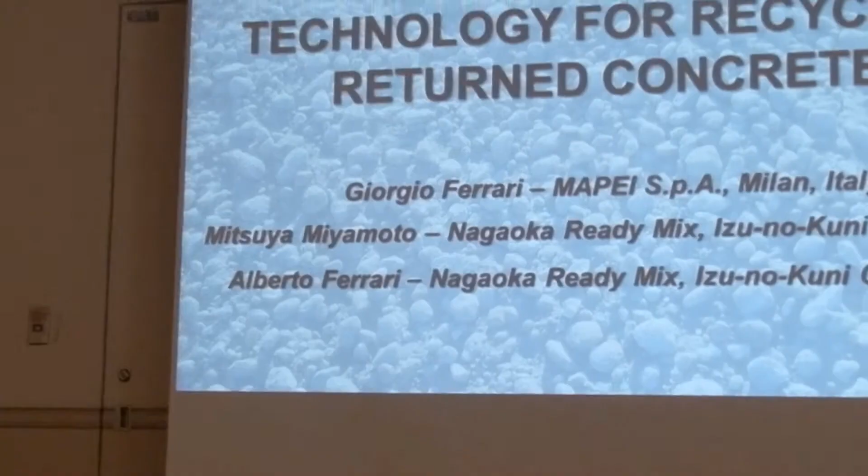I will do the first part of my presentation dealing with the technical and fundamental aspects of the technology, and then I will leave the floor to Mr. Miyamoto, who will describe the implementation of this technology in Japan.

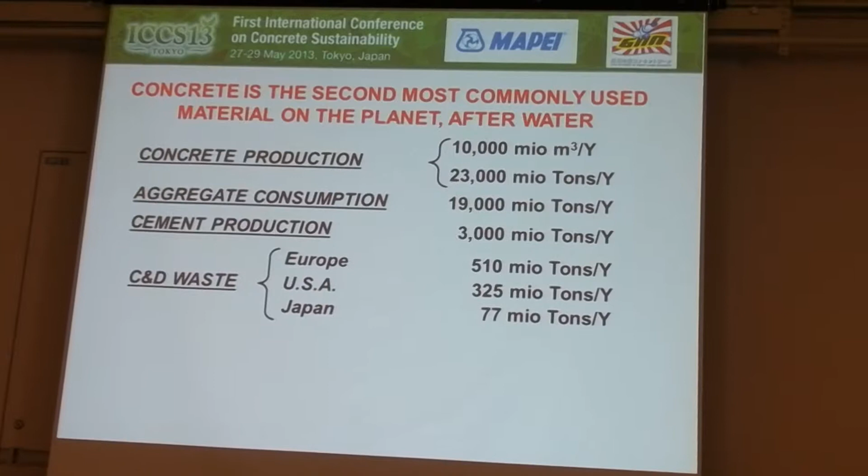Concrete is the second most commonly used material on the planet after water, and the production of concrete is globally huge. About 10,000 million cubic meters per year of concrete are produced.

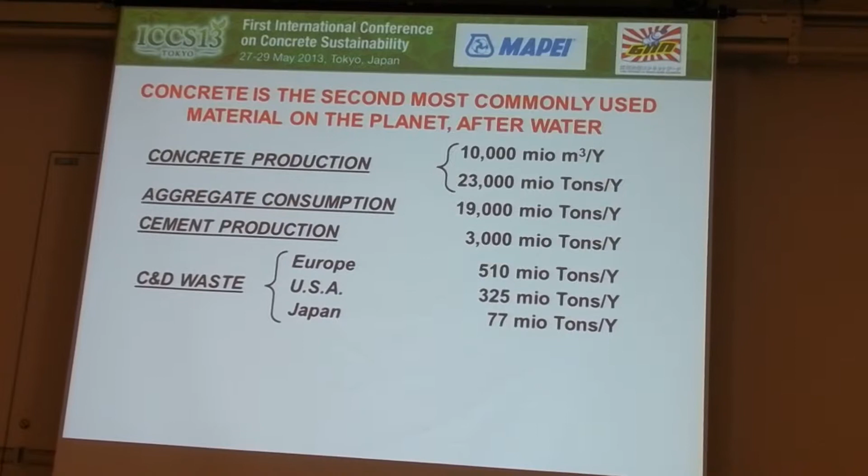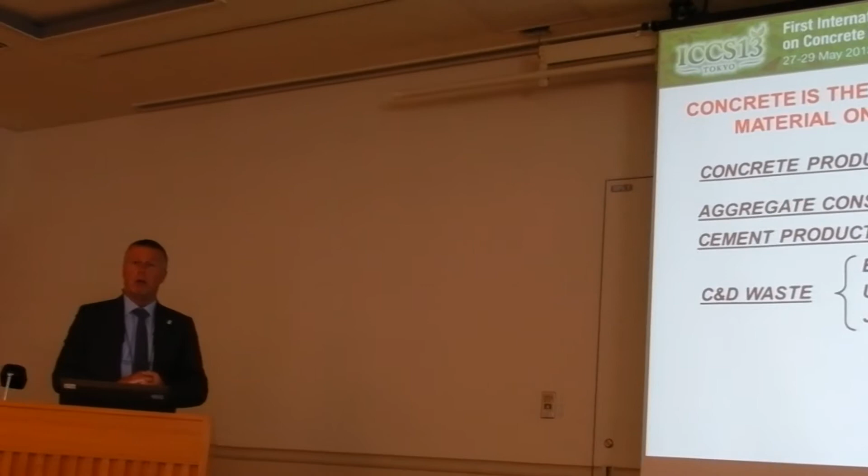This means that a huge amount of raw materials are used for aggregate and cement, and also a lot of waste is produced. Among these wastes there is returned concrete.

Returned concrete is the unset, unused concrete which is returned by the truck mixer from the job site, that for any reason is not placed and comes back to the ready-mix plant.

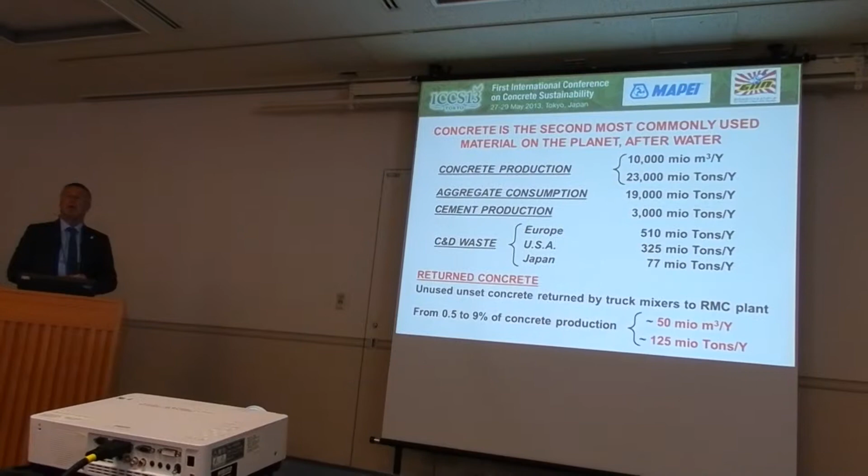In many cases, this material can be a waste with many impacts from an environmental and economical point of view.

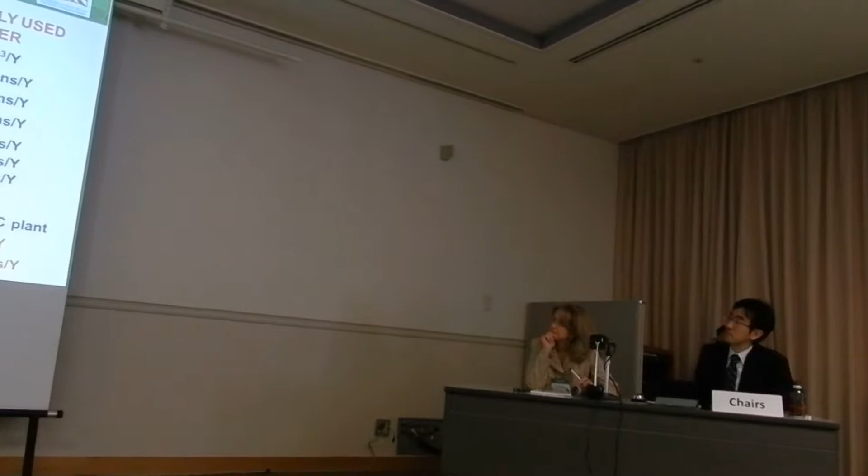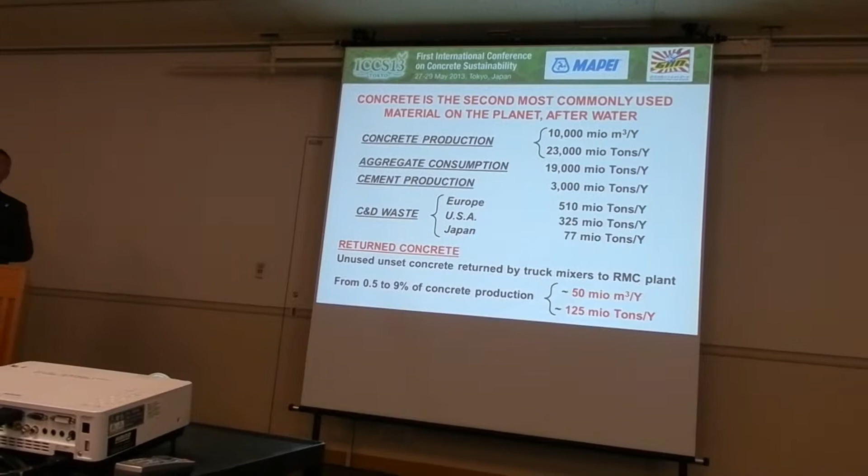In a conservative estimation, the global amount of returned concrete is above 100 million tons per year. That means more than double the amount of the total concrete production in Italy.

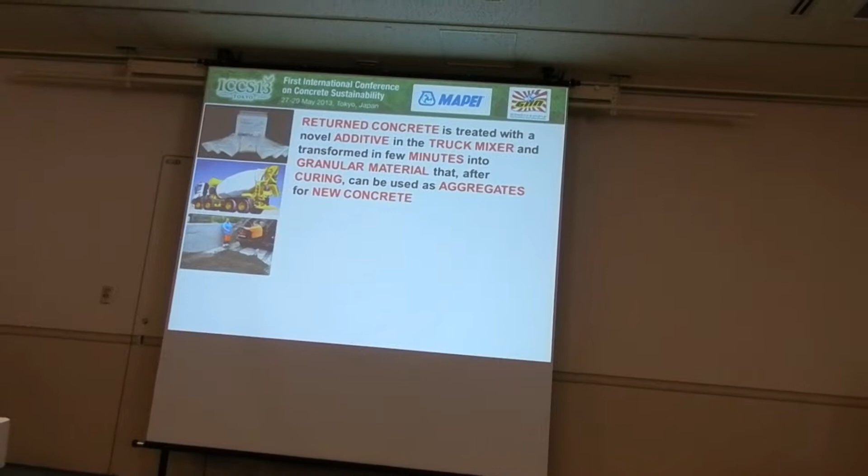With the new technology, returned concrete is treated with a novel additive in the truck mixer, and it is transformed in a few minutes into a granular material that, after curing, can be used as aggregate for the production of new concrete.

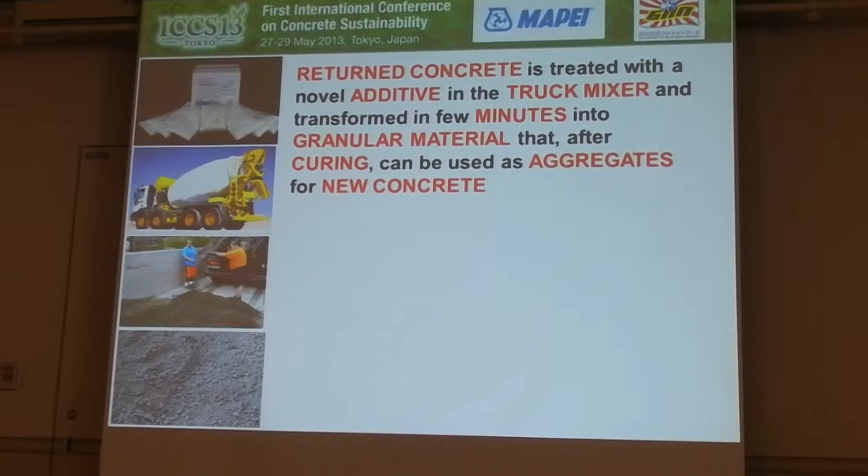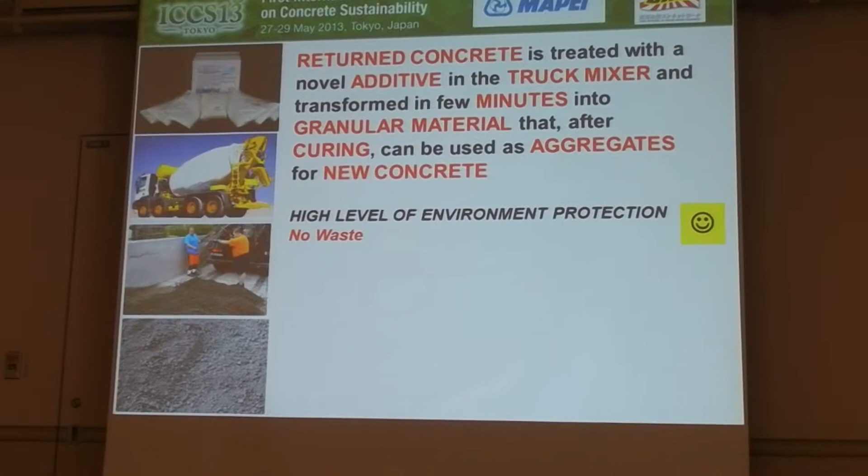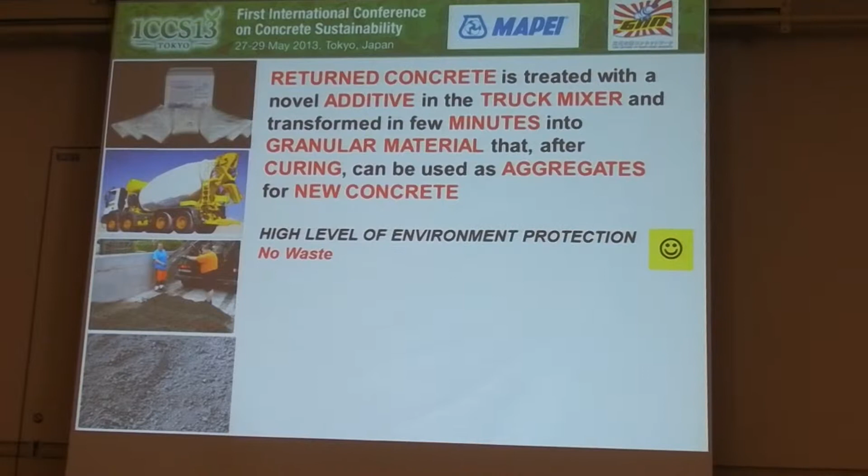This technology has many advantages because it's characterized by a high level of environmental protection, because no waste is produced. The concrete is completely transformed into a new material, so no waste, no liquid, no solid are produced.

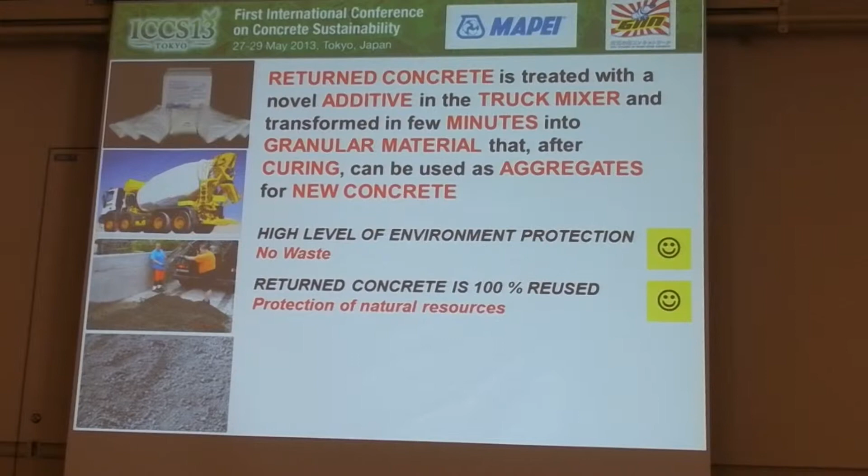The second advantage is that returned concrete is fully valued because it's reused 100%, and this allows saving of natural aggregate, protecting natural resources.

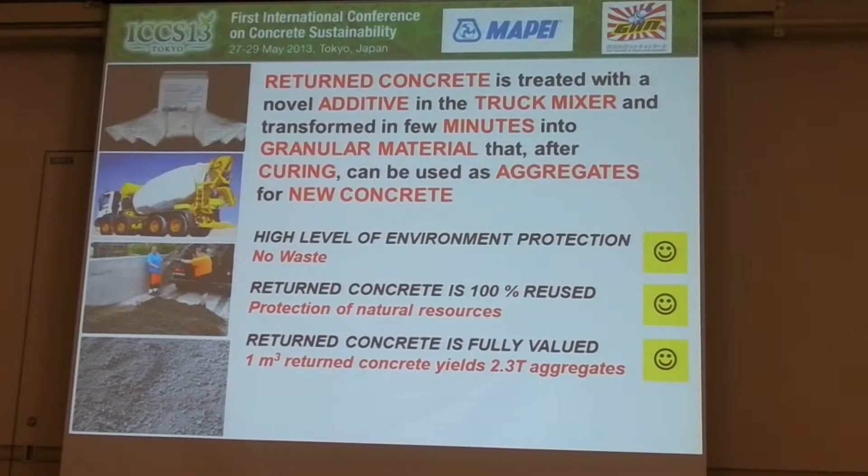From the economical point of view, 1 cubic meter of returned concrete is transformed into aggregate. This means that about 2.3 tons of aggregate are produced from 1 cubic meter of concrete.

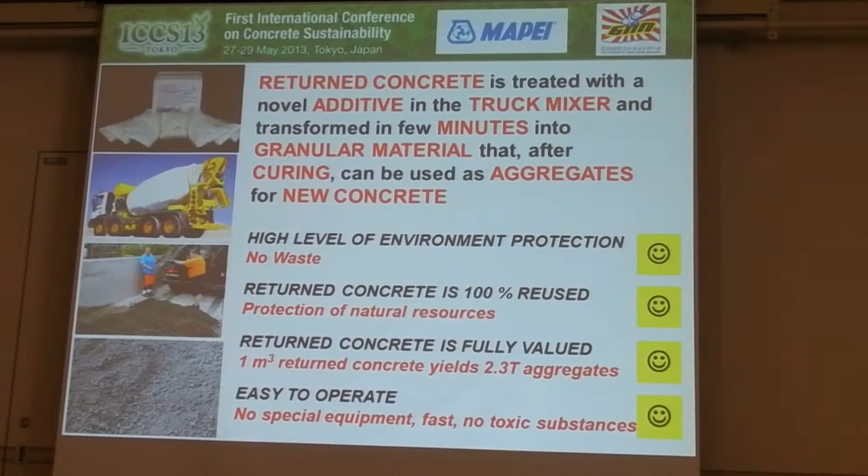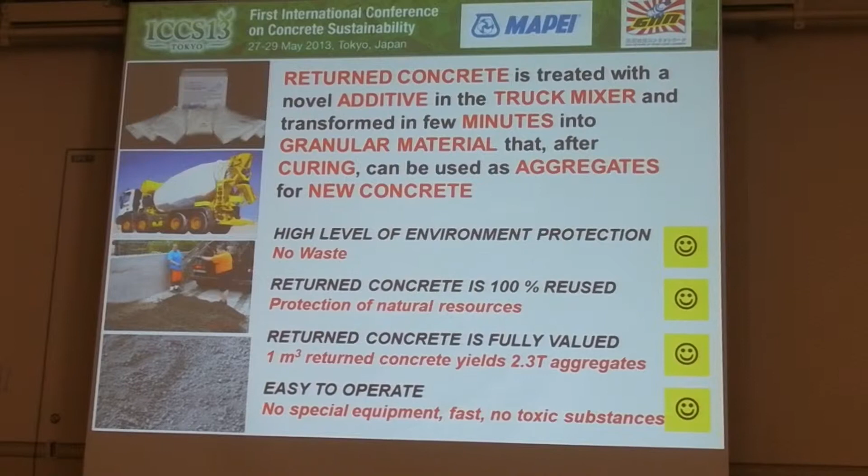It's very easy to operate because it doesn't require any special equipment, as the process is operated directly inside the truck mixer, and it's very fast. The overall process takes less than 10 minutes, and the additives are not based on dangerous substances or toxic chemicals.

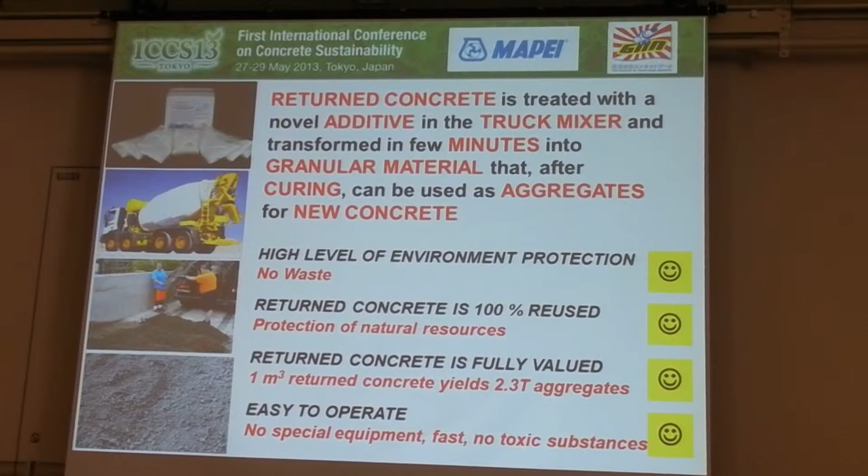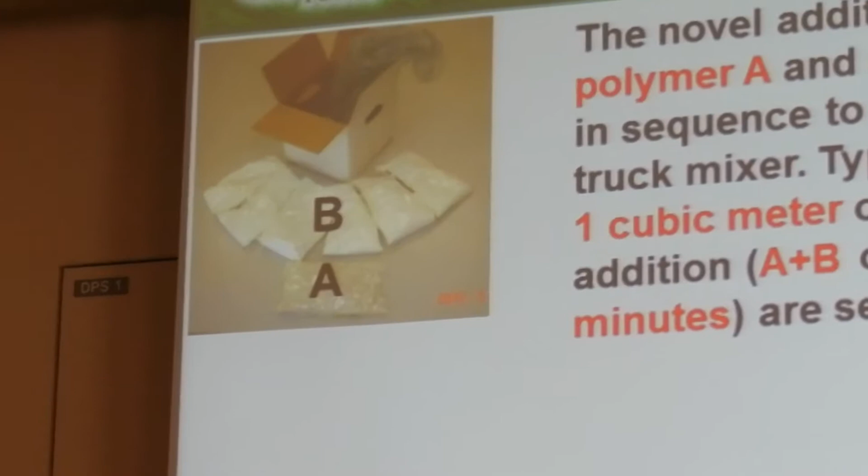The novel additive consists of a superabsorbent polymer, part A, which is in a water-soluble bag, and component B, which is an ettringite-forming compound, that are added in sequence to returned concrete directly in the truck mixer and mixed together.

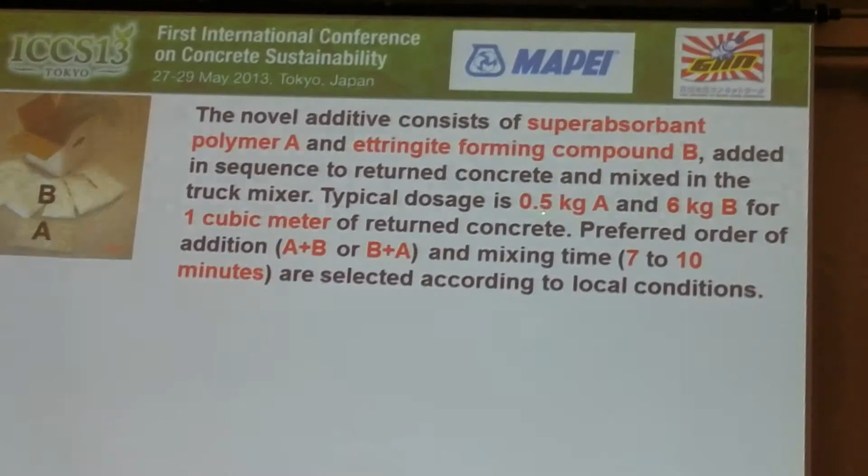The typical dosage is 0.5 kilogram of part A and 6 kilogram of part B per 1 cubic meter of returned concrete to be treated.

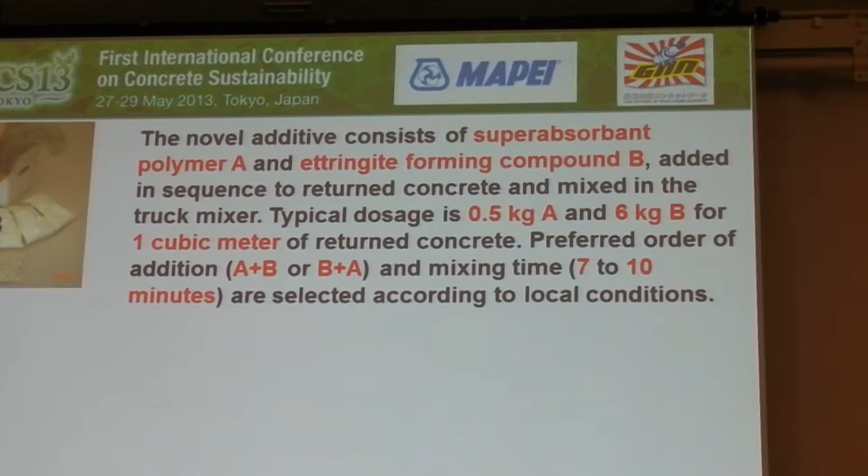The preferred order of addition may be first part A and then part B, or vice versa, first part B and then part A, according to local conditions. This means the type of cement, the water to cement ratio, and other variables.

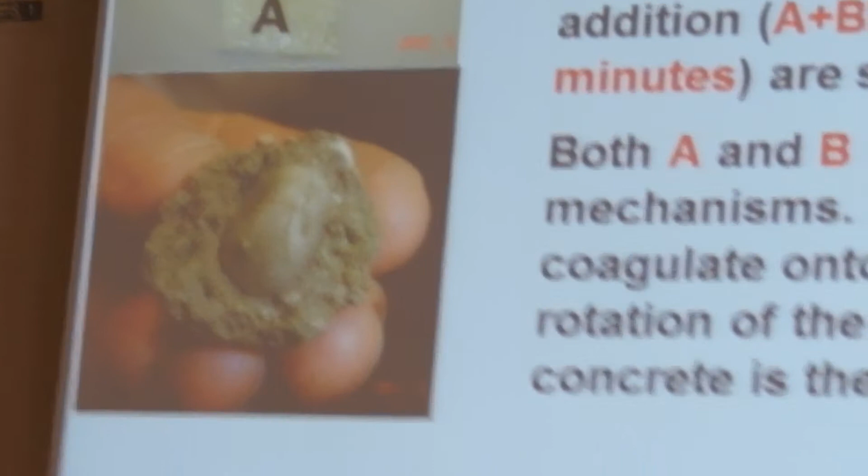Both component A and B act to reduce the free water. They have the capability to absorb or consume free water, and they act by different mechanisms.

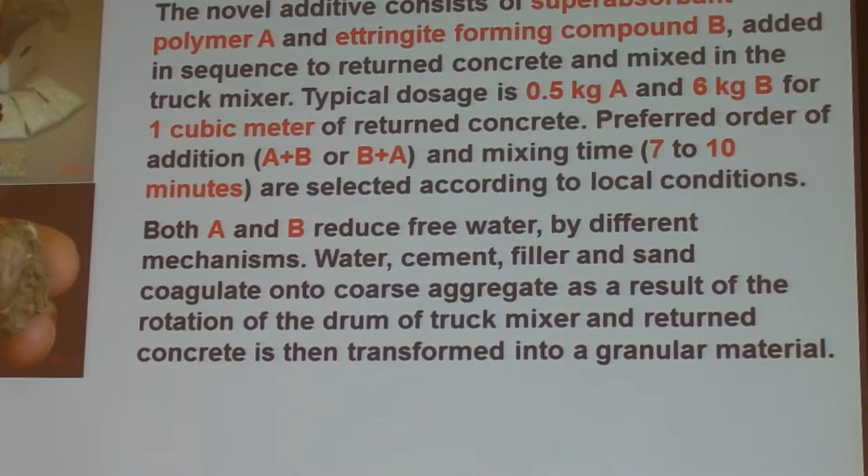The water, cement, filler, and all the fine particles of the concrete coagulate onto the coarse aggregate as a result of the rotation of the drum of the truck mixer.

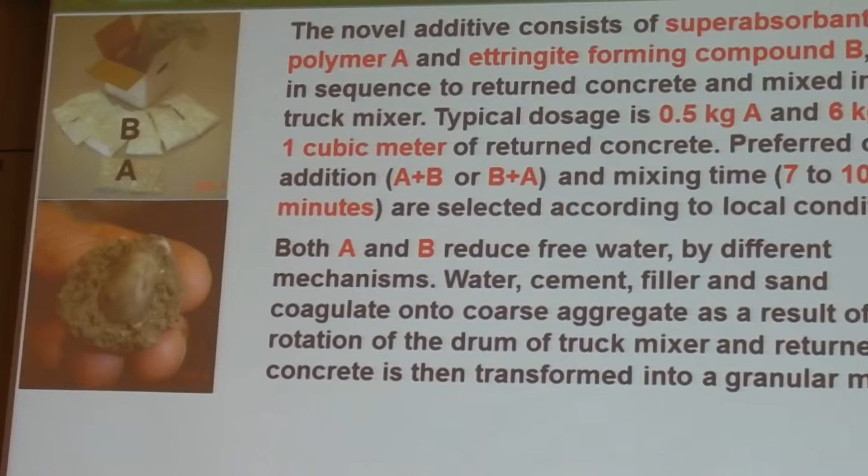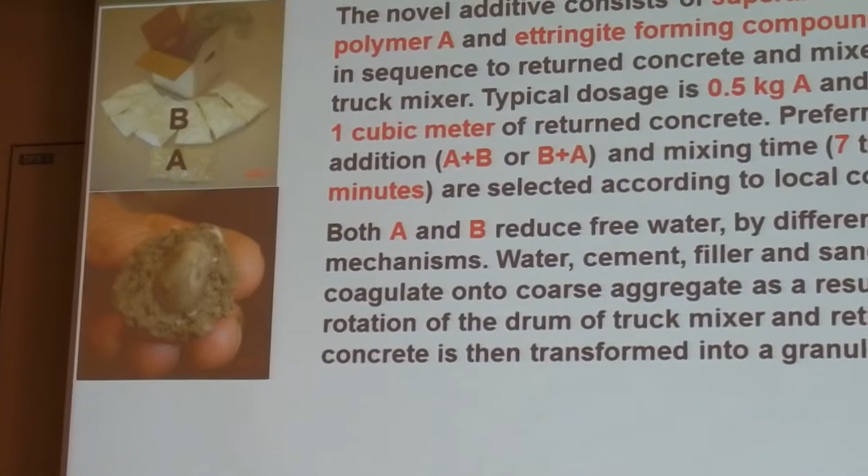Consequently, the returned concrete is transformed into granular material, like this example. You see there is the coarse aggregate inside as a core, and around it there is all the fine material, including water and cement, coagulated on it.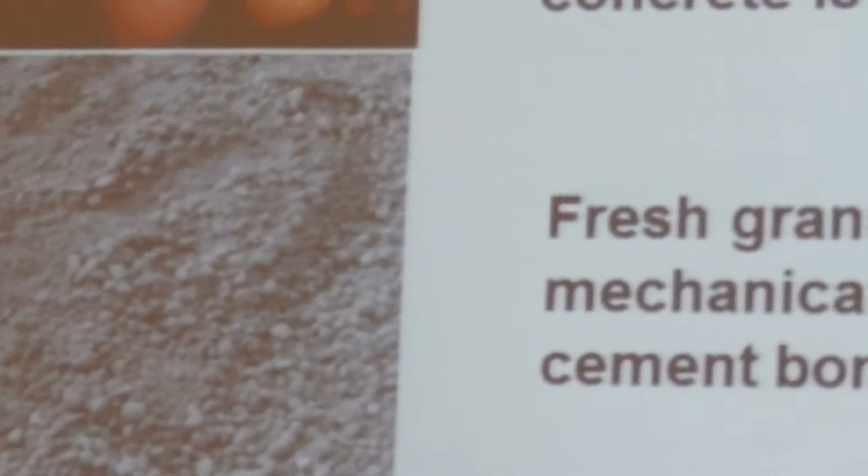After that, the material is discharged on the ground and let harden as a normal cementitious material. The day after, it is gently moved by an excavator in order to detach the individual grains, giving again the final aggregate.

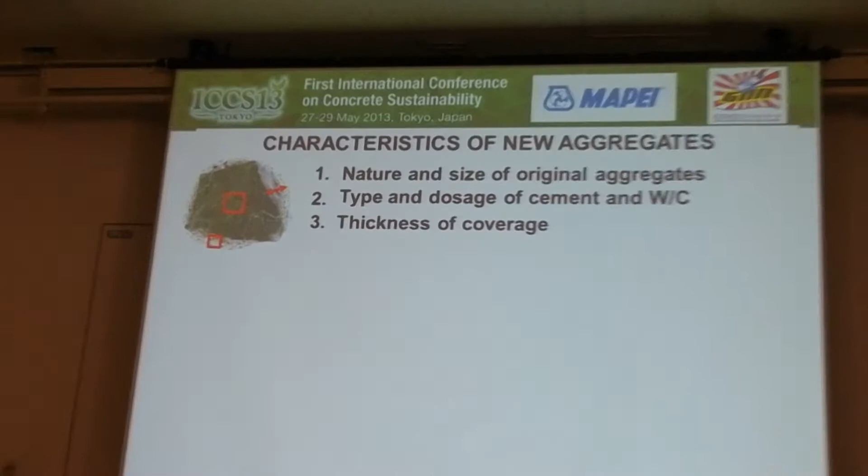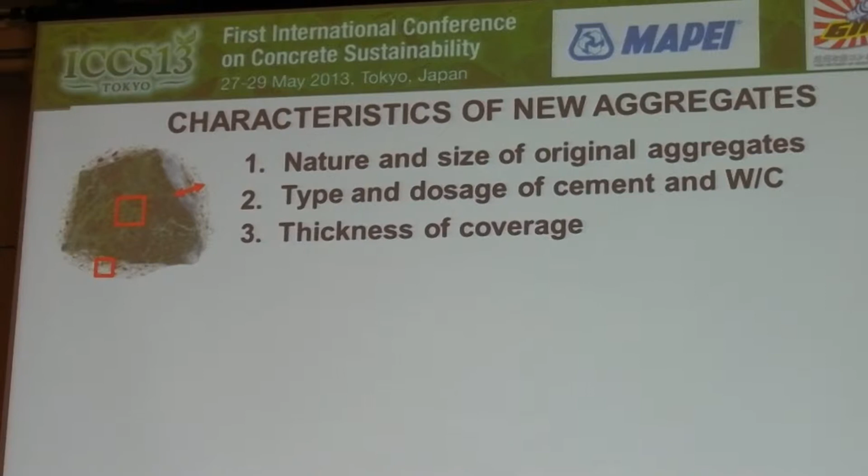Once the aggregates are obtained, they can be reused after some days for the production of new concrete. Of course, the characteristics of the new aggregate depend on the nature and size of the original aggregates, the type and dosage of cement, the water to cement ratio, and the thickness of the coverage.

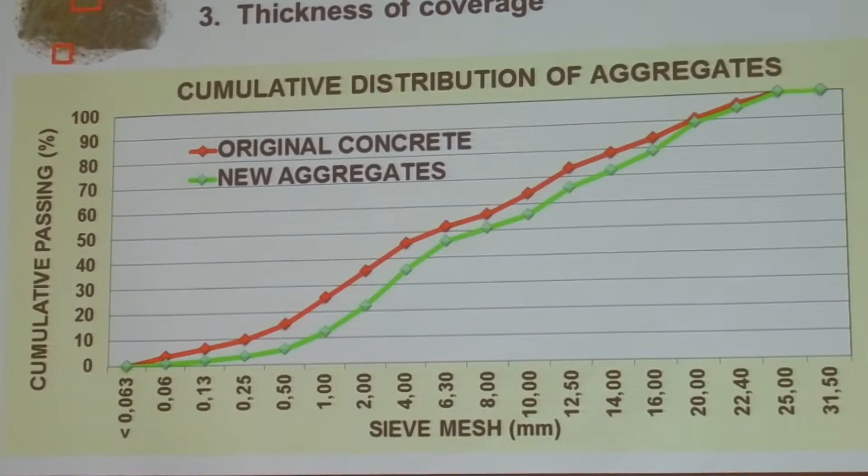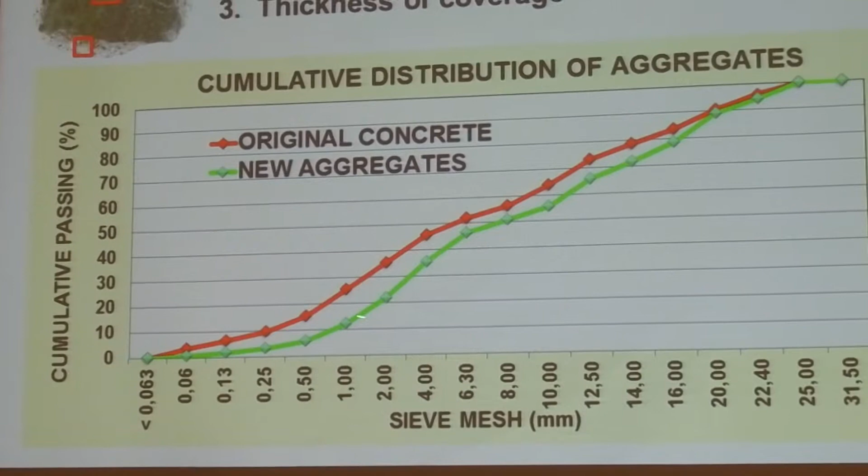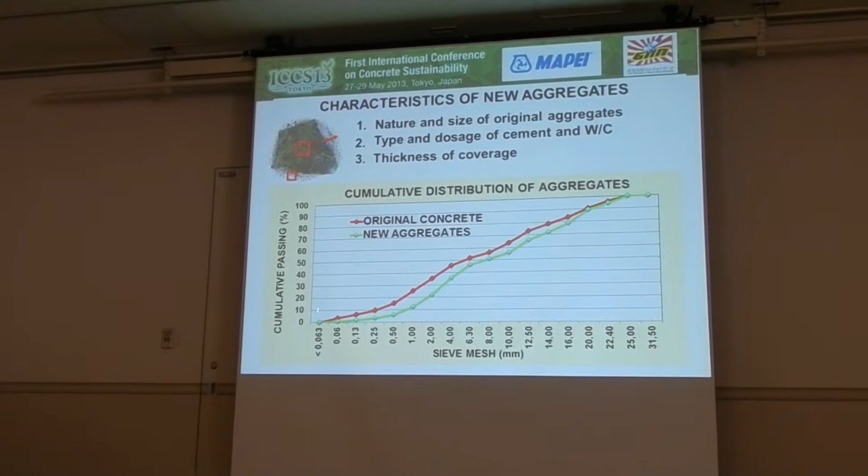The typical distribution of the new aggregate is represented in this graph. This is the distribution curve of the original aggregate in the returned concrete, and this is the typical distribution of the aggregate obtained from returned concrete after treatment. You see that you have a lower fraction of fine material, because the fine material coagulates onto the coarse aggregate, so you have a lower amount of the fine fraction.

Other physical and chemical characteristics of the new aggregate are a lower density, similar to typical recycled aggregates, and higher water absorption, which is a function of the particle size.

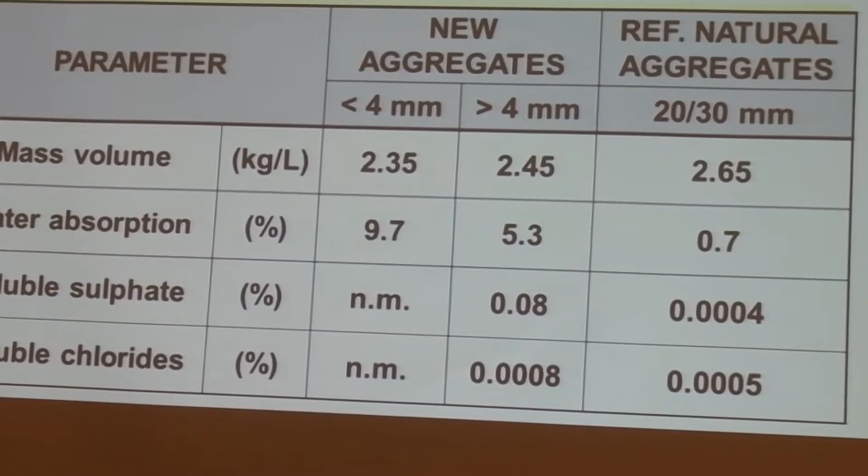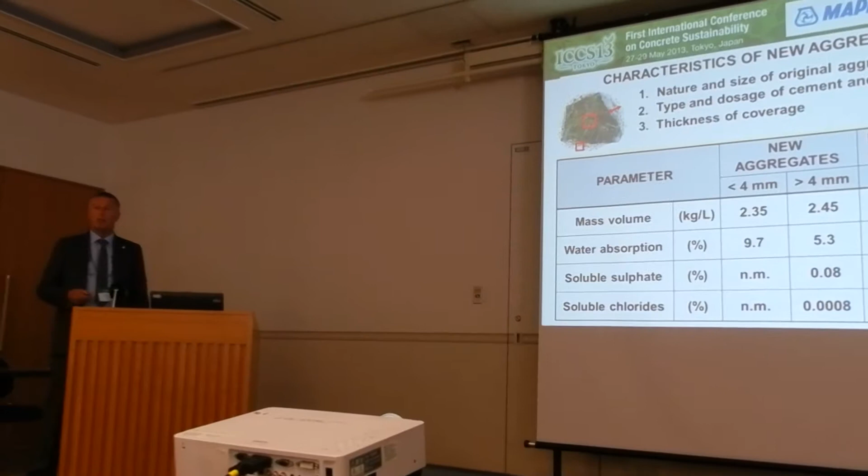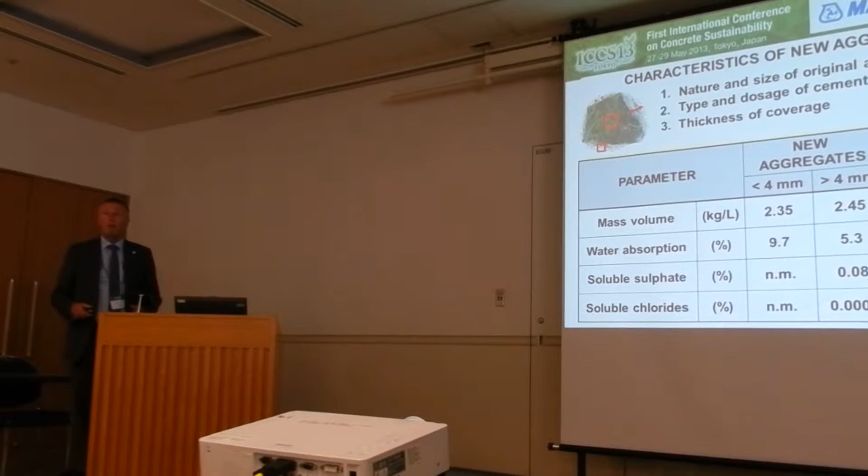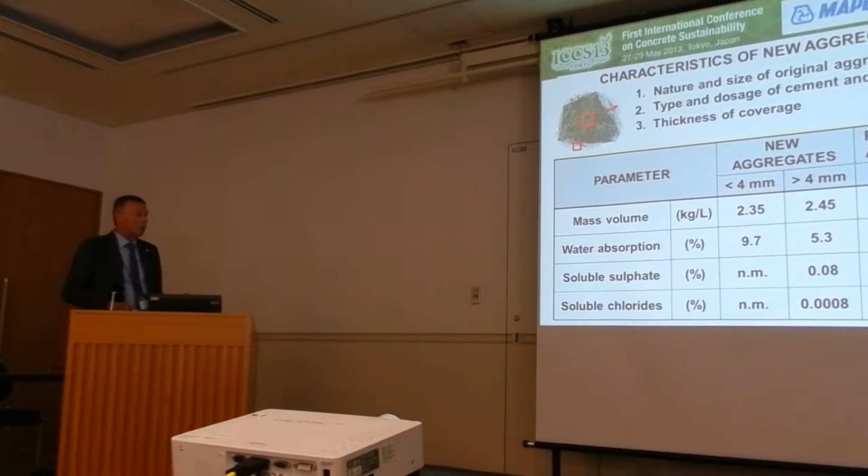Component B is based on sulfate, so the typical sulfate level is increased compared to a natural aggregate with very low sulfate content. The increase is not very high and remains well below the European technical standard. There is no increase in other components such as chloride.

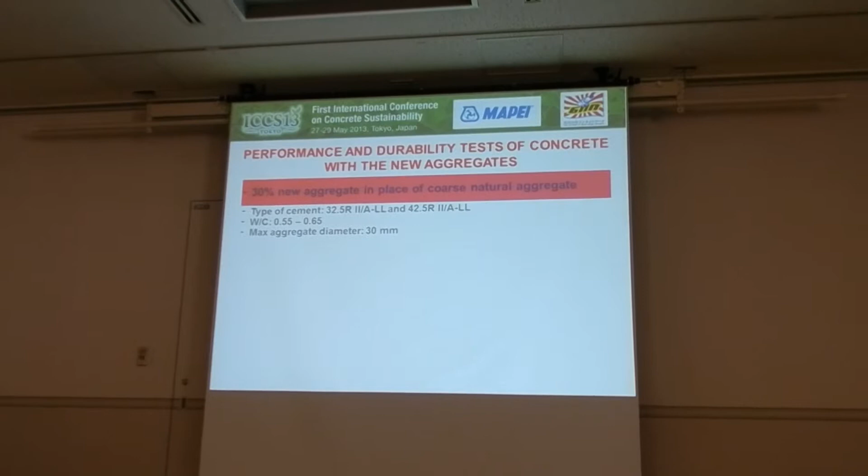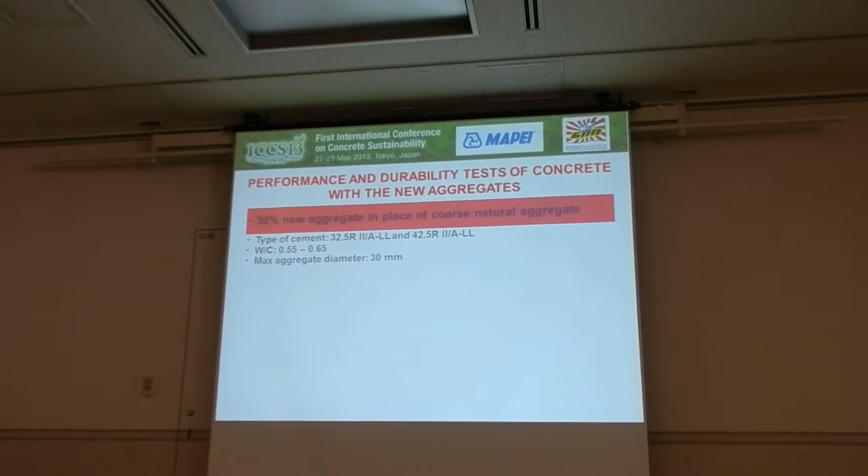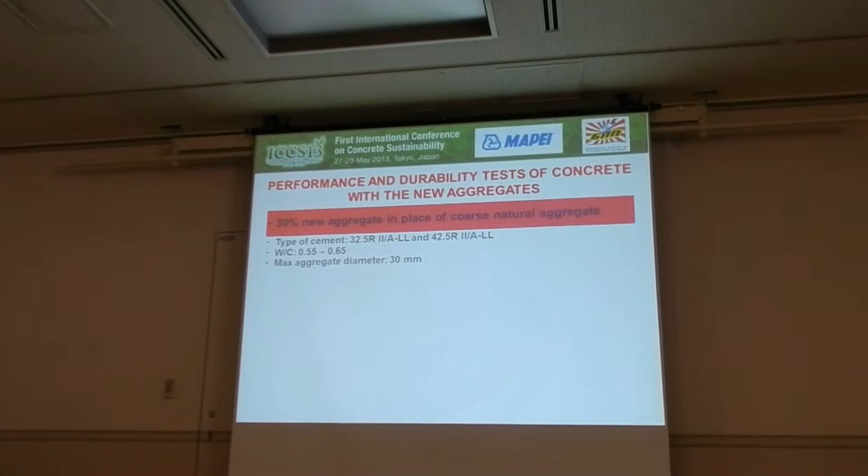What is the performance of concrete made using these aggregates? We tested by substituting 30% new aggregate in place of coarse natural aggregate, using different Portland cement from 32.5 to 42.5 and different water-to-cement ratios depending on the test. In all the concrete, the maximum aggregate diameter was 30 millimeters.

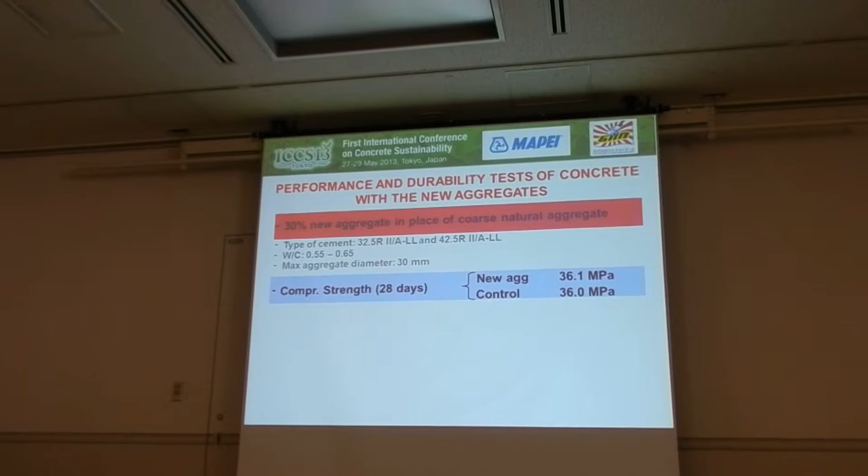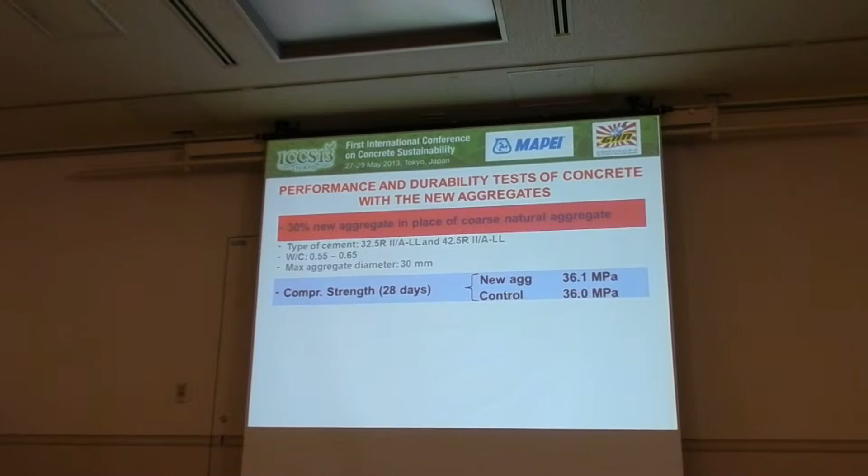We can see there is no effect on compressive strength comparing concrete made with 30% substitution of new aggregate in place of natural aggregate to the control, which was a similar concrete made with 100% natural aggregate.

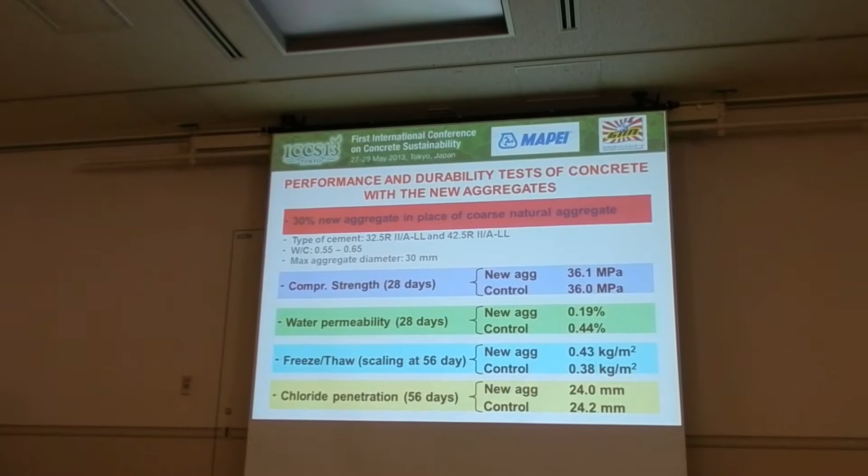Durability tests were also good. In particular, water permeability was even better than the control concrete with natural aggregate. We are investigating the reasons for this, and frost resistance and chloride penetration were good as well.

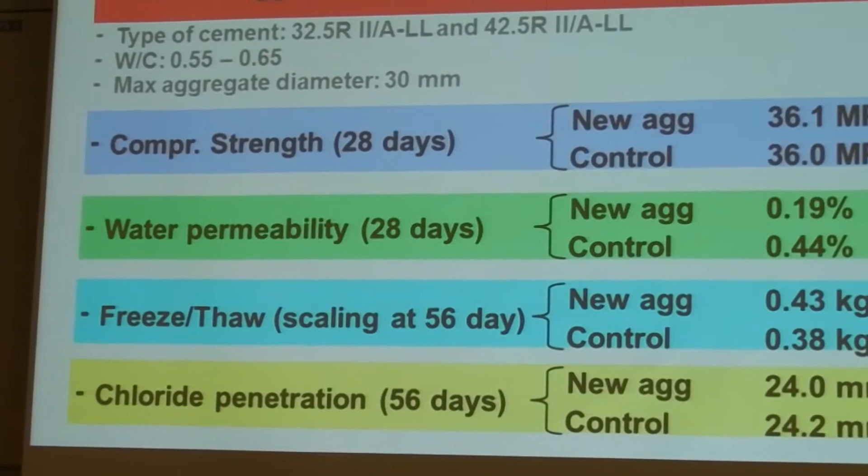Now I leave the floor to Mr. Miyamoto to continue the presentation about the application of the technology in Japan.

Good afternoon, ladies and gentlemen. My name is Mitsuya Miyamoto. I have the honor to represent GNN, a Japanese association of ready-mix concrete producers with over 45 RMC factories distributed all over Japan. The mission of GNN is improving concrete quality and sustainability through innovation, using new technologies and increasing recycling of materials.

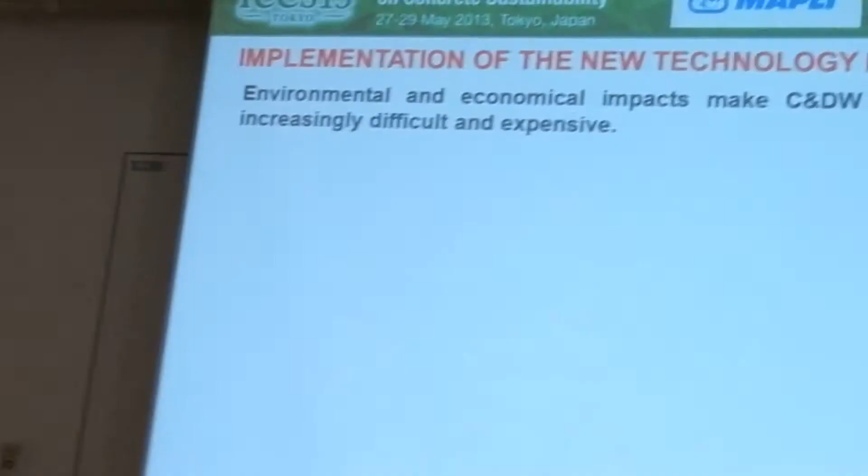Today, the disposal of construction and demolition waste is becoming increasingly difficult and expensive. In Japan, the cost for disposing of returned concrete is quite high in almost all prefectures. In the biggest cities like Tokyo, Osaka, and Yokohama, it can be up to 4,000 yen per cubic meter, equivalent to 30 euros per cubic meter.

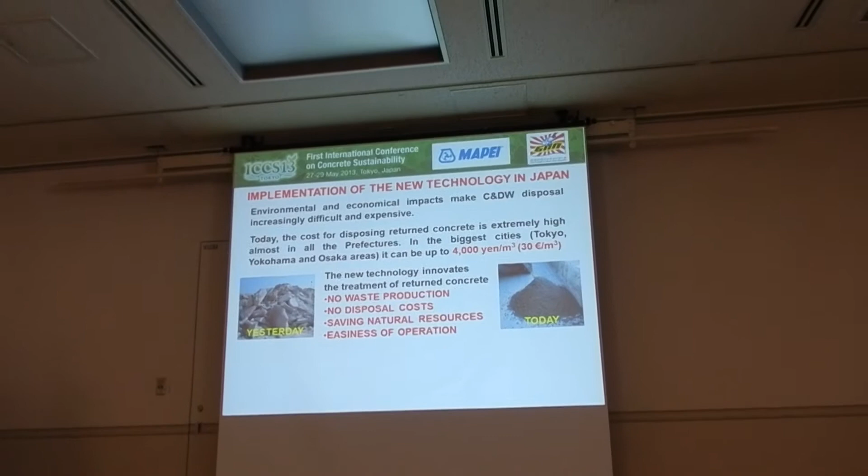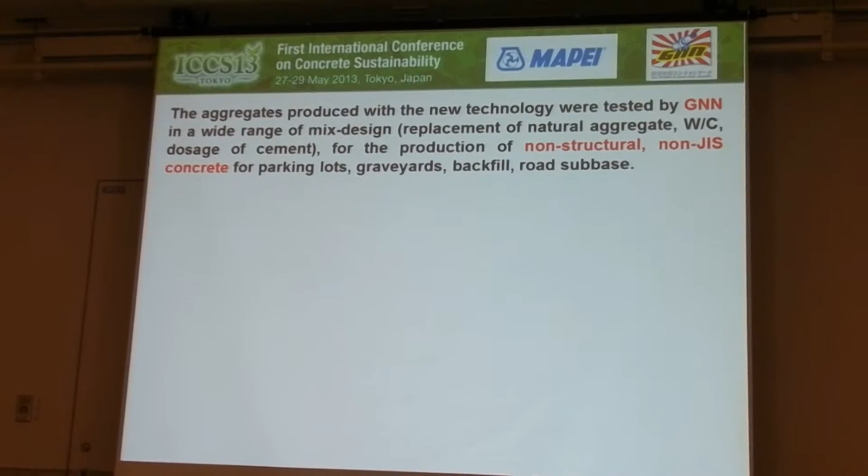We started last year a core research project to implement this new technology for return concrete in Japan. This technology represents a revolution compared to the past because it does not produce waste, cuts the cost of disposal, contributes to preserving natural resources, and is very easy and safe to apply.

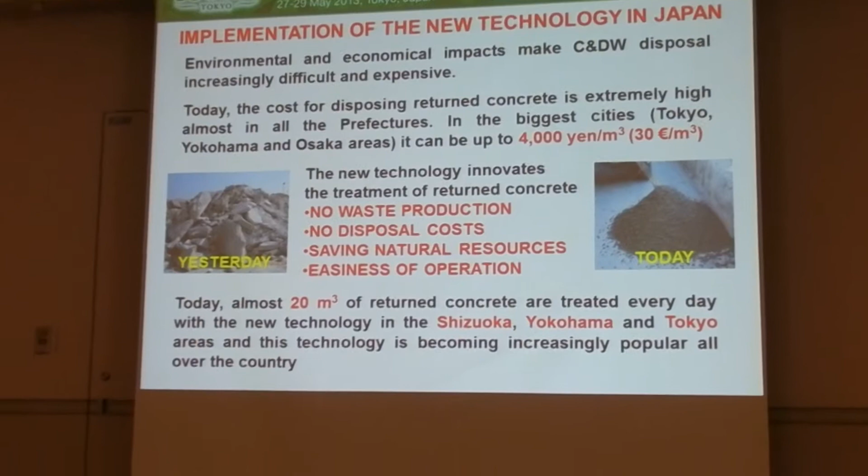Today, almost 20 cubic meters of return concrete are treated every day with the new technology in the Shizuoka, Yokohama, and Tokyo areas, and its use is becoming increasingly popular all over Japan. It will soon really take off.

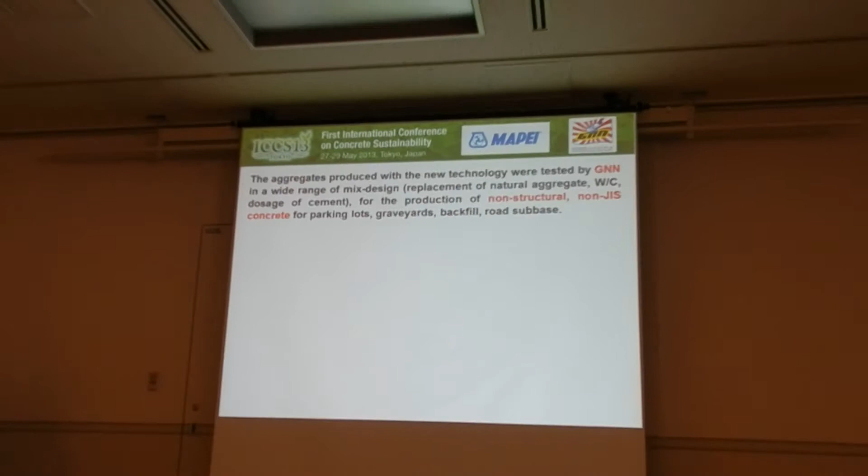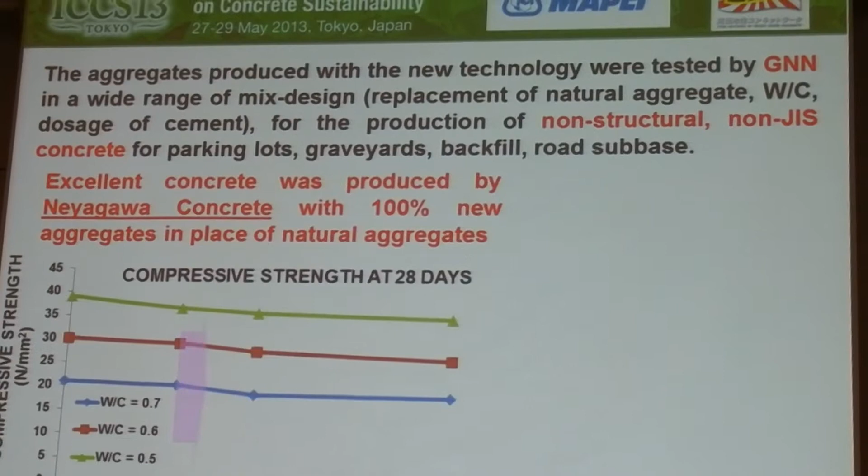The aggregates produced by the new technology have been tested by GNN in a wide range of conditions for the production of non-structural, non-JIS concrete used in parking lots, graveyards, backfill, and road subbases. We, together with other GNN members, discovered that it was possible to obtain excellent performing concrete by using 100% of the new aggregates in place of natural ones.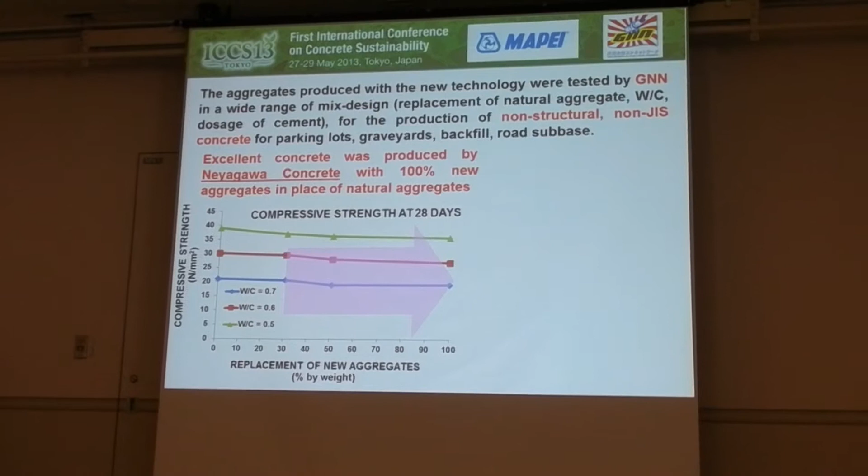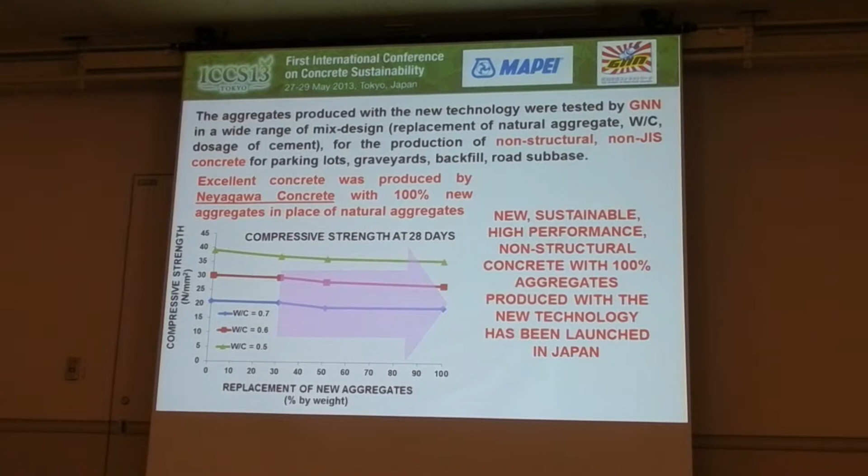100% new aggregate. After this discovery, a new sustainable, high-performance, non-structural concrete material with 100% new aggregate was launched in Japan. In the next slide, I will show you some examples.

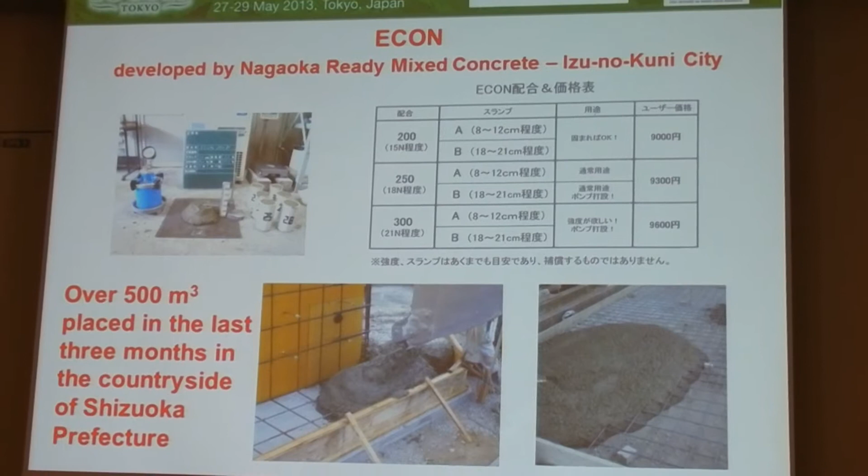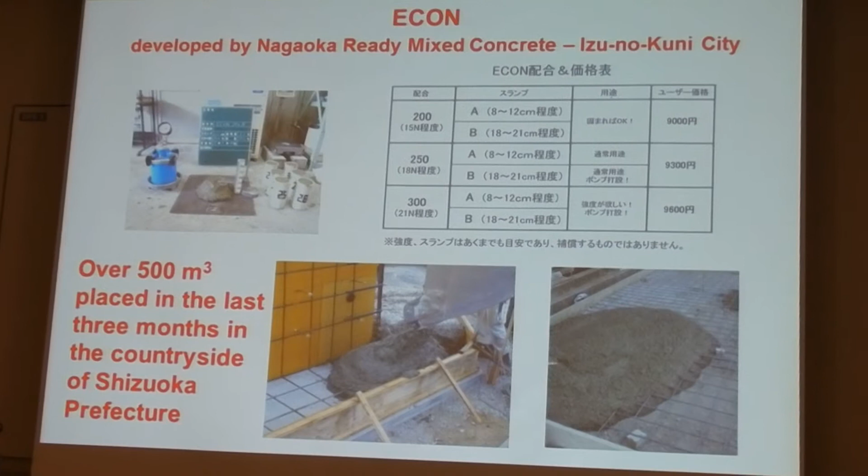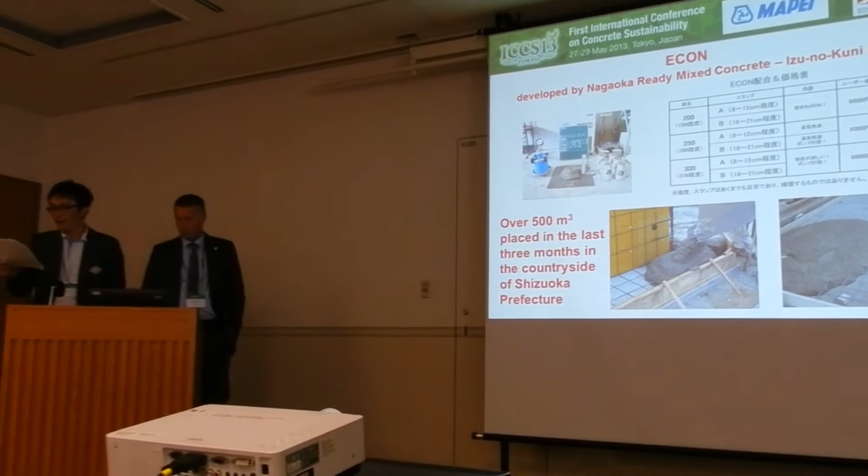Econ is a new concrete material based on 100% aggregates produced with the new technology. It has been developed by Nagaoka ready-mix concrete and is available in 6 different types, according to the class of strength and workability, depending on requested strength and slump value.

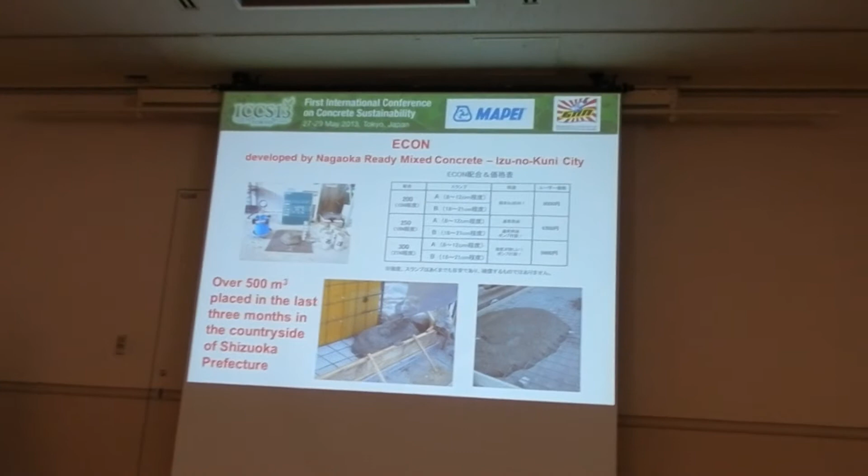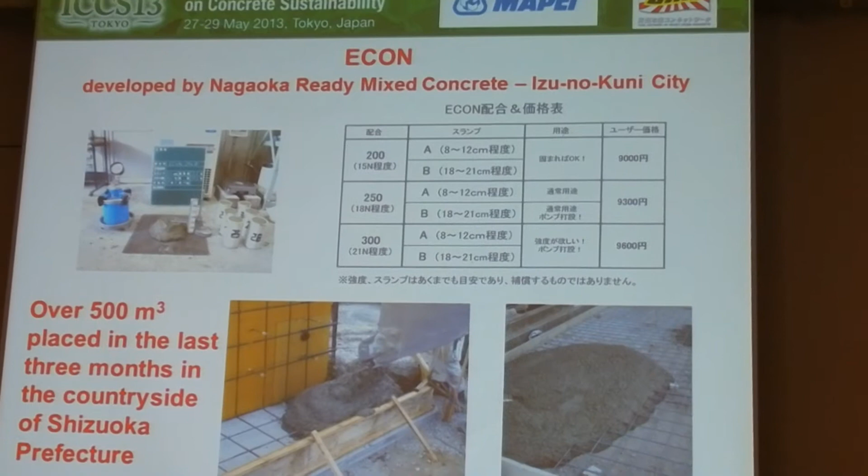Besides the excellent performance of Econ, thanks to its cheaper price, general contractors can save more than 30% in cost compared to concrete produced with natural aggregates. For this reason, Econ is becoming increasingly popular in the Shizuoka area, with over 500 cubic meters placed in less than 3 months. Now we are placing more than 200 cubic meters of Econ a month.

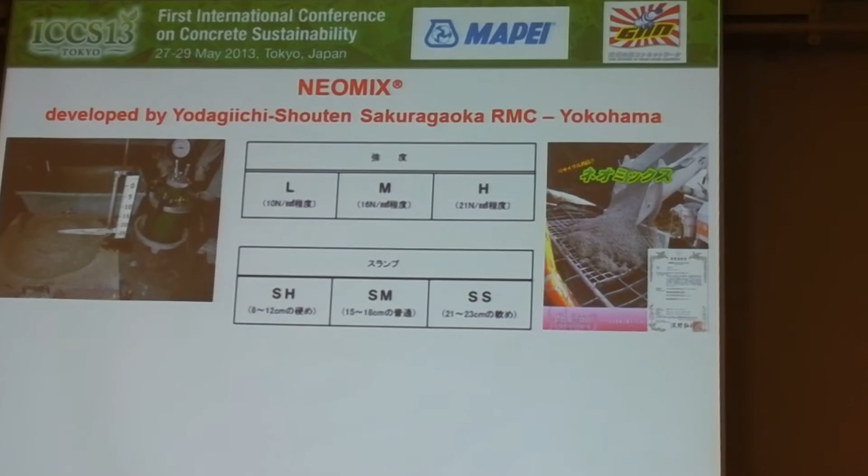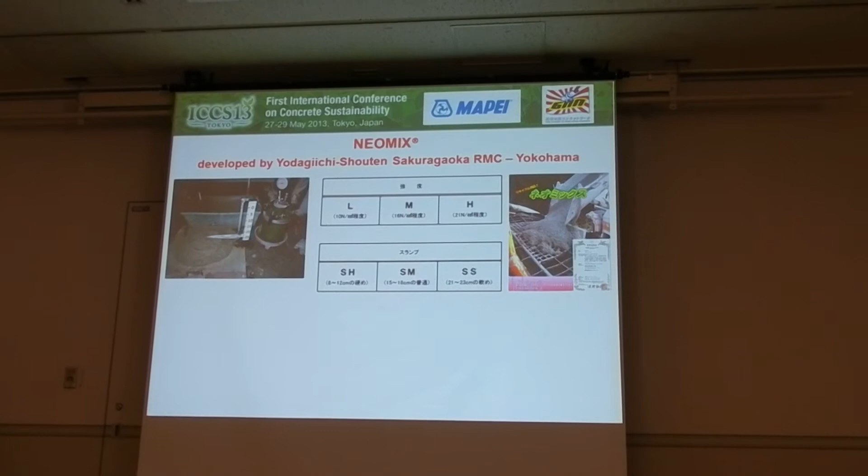Neomix is an innovative concrete composition developed by Yodagiichi-Shouten, Sakuragaoka RMC, and Kaneko Concrete in Yokohama. It is 100% based on recycled materials except for cement and additives: 100% aggregates produced with the new technology, and 100% recycled sands and sludges. Thanks to its excellent performance and cheap price, Neomix is increasingly used in the Yokohama and Tokyo areas, with over 500 cubic meters already placed.

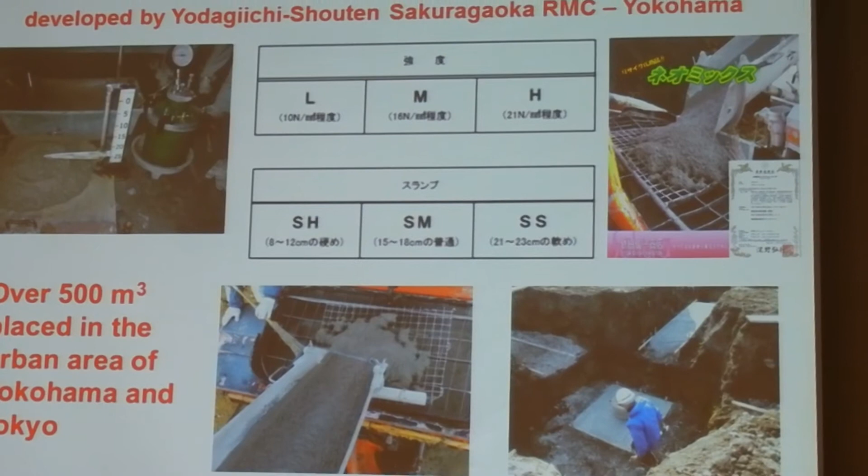With these two examples, Re-Con Zero and Neomix, we don't dispose of return concrete anymore. Actually, we want more - please give us return concrete.

We finished with just two slides of conclusions, but I think we have explained quite well the fundamentals and applications of the technology.